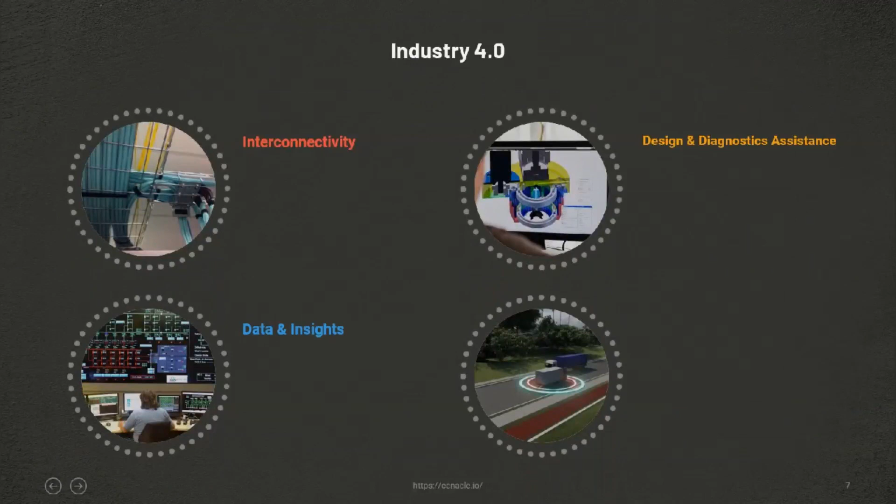Now after about 50 years, half a century, we are in the period of the fourth industrial revolution. What does it offer that is significantly different from the previous revolutions? The core key points and key drivers for this Industry 4.0 revolution are interconnectivity.

For example, we all know how human beings connect - we use mobiles, communication networks, postal services, etc. Human-to-human connectivity is very well known. But what about machine-to-human connectivity, and more importantly, machine-to-machine connectivity? There's also the concept of decentralized architectures, which we'll cover briefly in the coming slides. Machine-to-machine connectivity is going to redefine the whole paradigm of how machines work and cooperate together, so this interconnectivity is a new paradigm that did not exist earlier.

In earlier periods, a machine was a black box - you didn't know what was happening inside. A machine could be heading towards a breakdown at any point in time and you wouldn't know. This interconnectivity, combined with data and insights - real-time insights into what's happening inside, transparency about the machine's capability and status - defines a new paradigm. I'm going to demonstrate a bit about condition-based maintenance, but overall this redefines the asset utilization of the machinery.

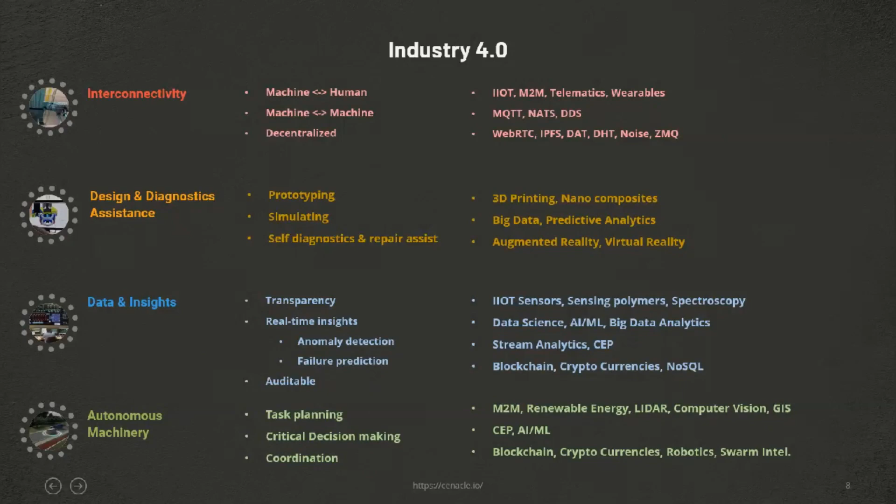So let us start with the first one, machine-to-human connectivity. How does a machine inform about itself to a human?

As I said earlier, every machine is a black box. Now we are trying to get more information about the machine to humans, either to get administrative suggestions, or to make business planning easy, or to plan for fault tolerance or failures. The core concepts here fall into two areas. One is sensors: every machine or asset is attached with some sensors that gain data about the status of the machine and relay that information to the people, the stakeholders.

So the first part is the sensors. The sensors could be analog sensors or digital sensors. Digital sensors are gaining more rapid adoption in the industry, but till now we have these analog sensors that gather data. So what kind of sensors do we mean? For example, there are many sensors which we already use in smartphones and many of our machines and IoT, etc. Things like proximity sensors.

For example, when two items get in contact, such as a door, whether it's closed properly or not, or a brake, whether it contacted properly or not. Then vibration sensors identify the frequency of vibration of an asset or machine. If anything goes beyond a certain limit, these vibration sensors give an alert, or they keep monitoring the frequency with which it is vibrating.

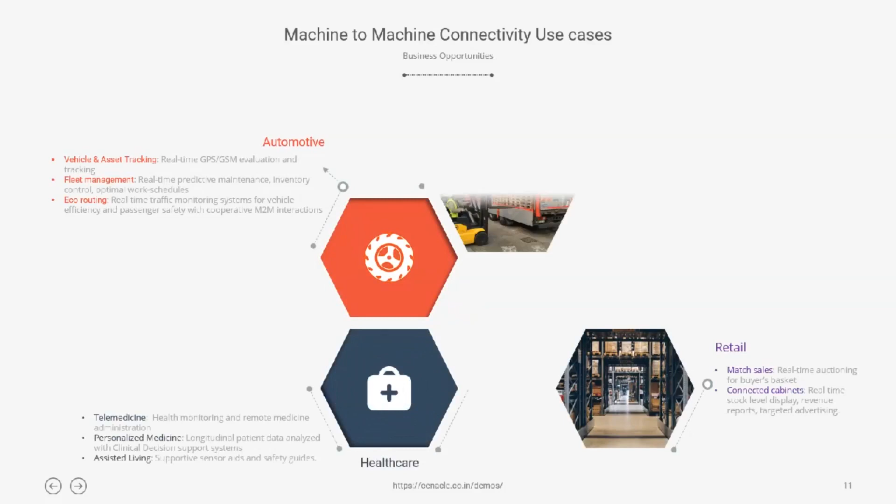This is the use cases. And these use cases are not restricted to one area. They span over multiple sectors, whether you name it automotive, retail, finance, supply chain, energy, healthcare, education. So many, for example, starting from predictive maintenance or condition-based maintenance, tracking your vehicles in real time, auctioning for buyer's basket, a connected cabinet in retail industry, telemedicine as we were just discussing in remote areas, personalized medicine, monitoring a smart grid, or remote monitoring of oil pipelines in remote areas where there is nobody.

Especially these oil pipelines, they need to be monitored continuously because it's very risky as well as very costly an affair if any oil pipeline breaks down. And then the whole supply chain industry is going to be revamped thanks to this machine-to-machine connectivity.

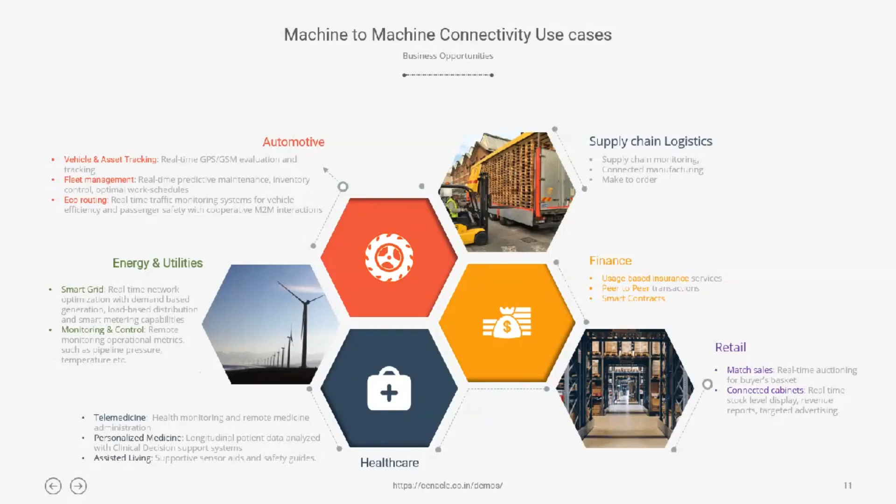There are some very important Industry 4.0 contributions that create new opportunities, things like make-to-order and connected manufacturing a possibility. We are going to see one specific case here, which is predictive maintenance, let us say condition-based maintenance.

When we're talking about condition-based maintenance, let us say there is a vehicle and you need to identify whether that vehicle is fit for journey for the next 1 year or next 3 years, next 1 month, 3 months. How do you know when your vehicle is going to break down?

For example, on a train, there are OTMR which gathers all this data from 300 plus sensors, things like the speed, the traction control, whether a door is closed or not, whether brakes are slipping or not, etc.

So in a typical vehicle, it's now mandatory by regulations that every vehicle manufactured after, I think, 2006 is equipped with OBD sensors, onboard diagnostic sensors. Right now you could go into your vehicle and connect your OBD sensor to your laptop or even your phone and start monitoring the data.

But how can you use that system and enhance it to predict when the machine is going to break down? So overall, we call it condition-based maintenance, where we predict the failure of a machine based on the condition of the machine. The machine could be a vehicle or anything - it could be an asset or even a human being. We'll come to that in a moment.

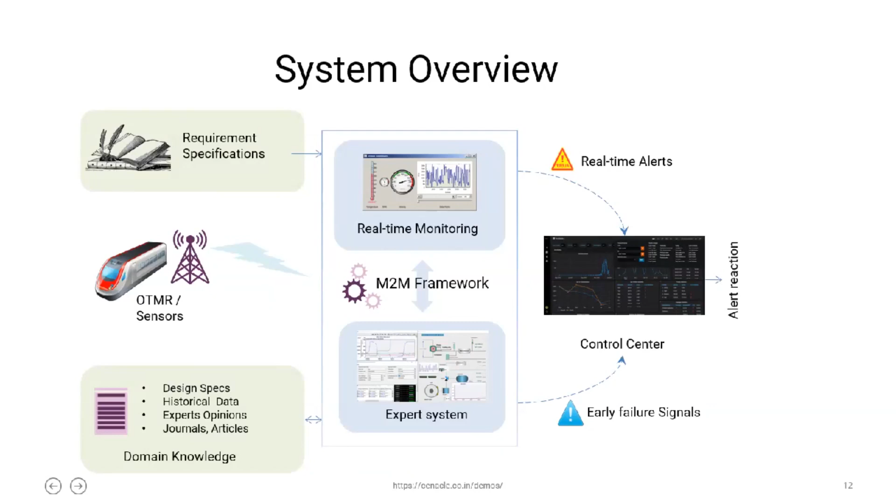So this is overall system of a condition-based maintenance. I'm going to demonstrate in a few minutes how this operates. But in general, the system or machine being observed could be anything that generates some data. For example, it could be a human being.

You must be aware of devices like Fitbit that gather data, body vitals, and then identify the trends. In general, you could identify the trends and then gather the data to make certain decisions about the condition of your health, and then raise immediate alerts to the caretakers.

So when we are talking about condition-based maintenance, it does not necessarily mean a vehicle. It could be a human being also. It's just that the domain is slightly different and the data that need to be captured is different, but the overall sensors, operations, and expert systems could be tweaked and trained for these kind of operations.

So let us have a brief demo of condition-based maintenance where I'll try to demonstrate how the process of gathering the data and identifying anomalies works, and then see how to predict failures, etc.

Overall, this kind of condition-based maintenance is useful for predicting remaining useful life of an asset. For example, what is the remaining useful life of my vehicle? How long could I use this vehicle before it breaks down? Let us say I know based on the data that the vehicle is about to break down in, say, 3 months. Then I could plan a predictive maintenance schedule so that I could take it to the proper maintenance people and get it revitalized or repaired.

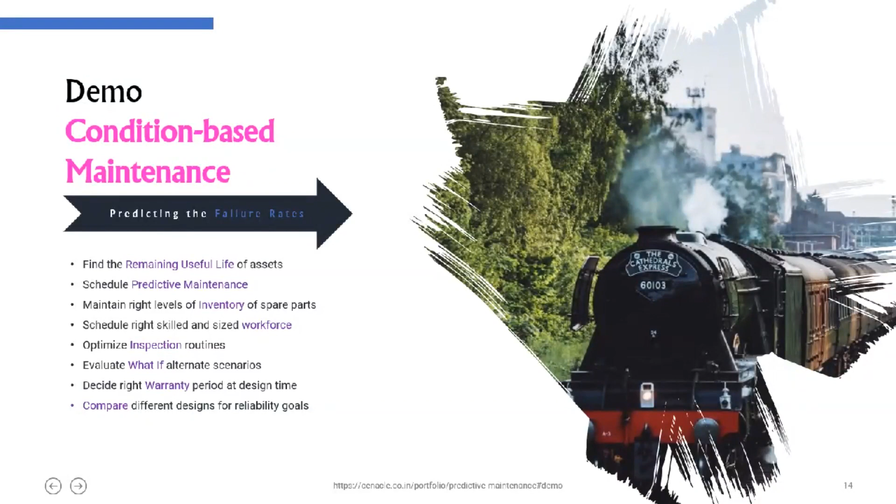So let me demonstrate the condition-based maintenance aspect, how we do it in the software. I'm going to demonstrate with some simulated sensors here. For example, I'm starting some sensor simulators, which actually, in a real world scenario, all this data comes from different IoT sensors, but here I'm simulating them on my machine.

And then I'm going to start a dashboard that is represented. For example, here we have 4 sensors that are sending data at different frequencies. Each is a different data point, like temperature, RPM, velocity, etc.

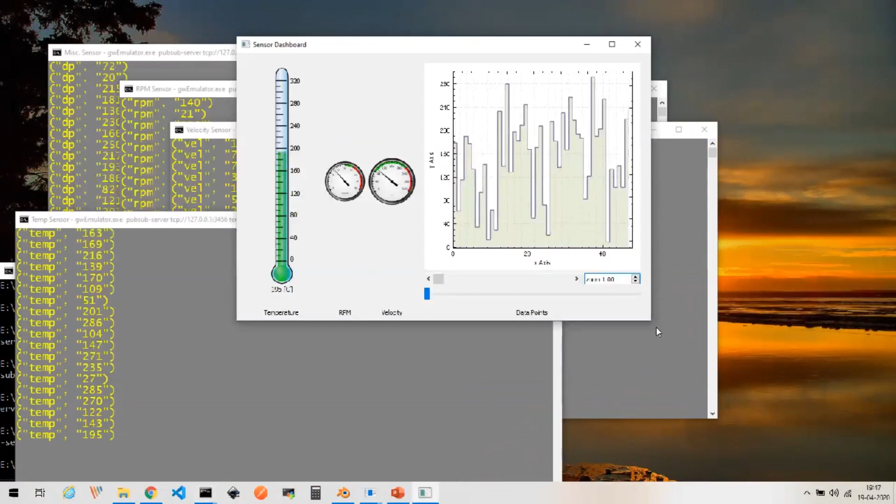And then we have this dashboard that gathers this data in a centralized control center and analyzes the trends over it. For example, here you could check this data coming from this temperature sensor. Whenever it is changing, the data is captured over the network and it is represented in the sensors.

Whenever it is going beyond certain limits, it records it as an anomaly, and here it is visually indicating it. It also indicates it through emails, SMS alerts, as well as some notifications to the administrative personnel. And overall trends are recorded here, and in real time the data is

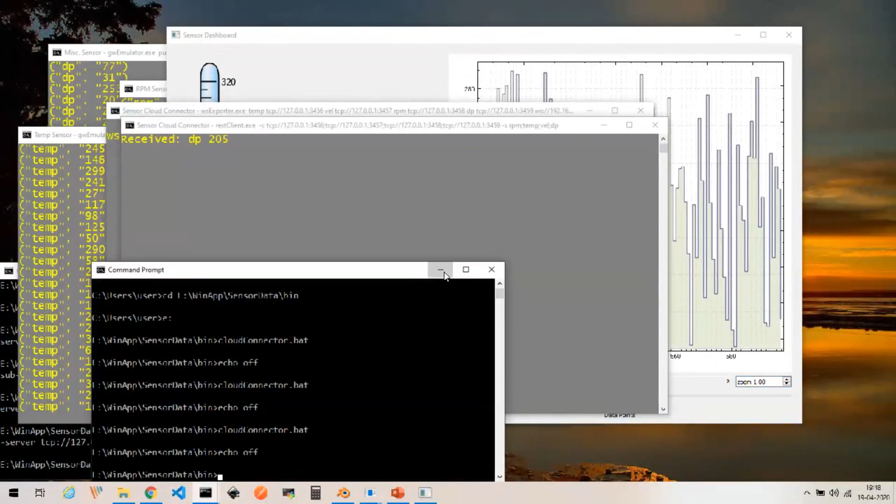streamed. Right now, the data could be streamed not only to your machine, but it could also be streamed over a network. For example, I am sending this data to, let us say, a cloud. For this, I have started the cloud connector, and I am also starting now a web server that will give me the, let us say, a cloud capability.

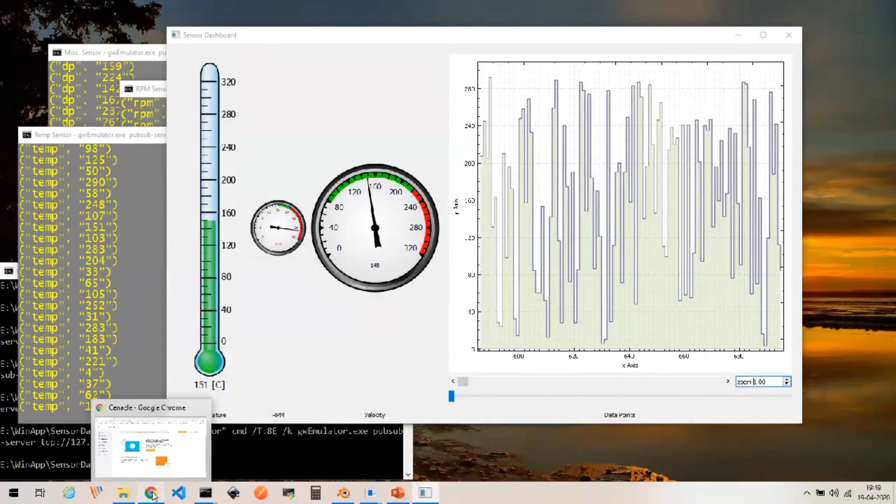Right now, I'm demonstrating it. I'm going to access the same data, network data, over a web page. And this web page could be hosted on any of your cloud machinery.

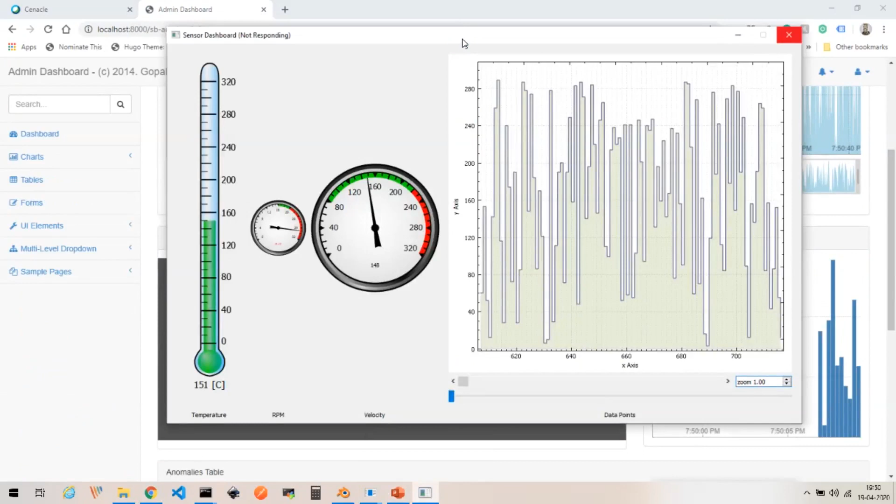And the data is same as being received on the centralized dashboard administrator. And here you could see the warnings that are being recorded. Whenever there is a critical warning or error happening, the data, hope the page is refreshing properly on this WebEx. But in general, you should be able to see all these warnings, etc., in real time as they propagate. And then the notifications could be sent to the administrators.

So this is the data capturing part. Typically, we do this with different technologies here. In this small connectivity part itself, there are so many technologies that are involved. And then what I'm going to do right now is demonstrate a condition-based maintenance, how it

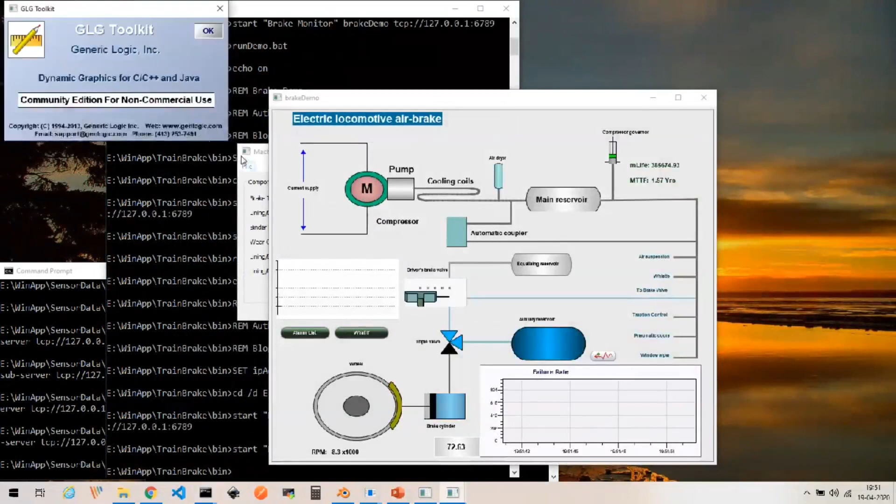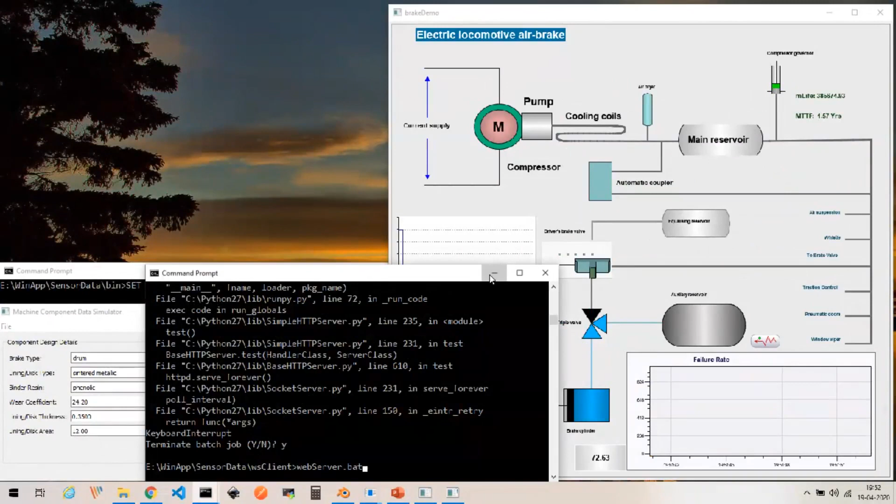here. What I'm demonstrating is, let us say, a brake failure. Consider an electric locomotive and electric train, and it has so many components.

One of the components is a brake, let us say, and our goal is to predict when the brake is about to fail. Now, when we say a machine failing or a vehicle or asset failing, it does not necessarily mean the whole machine is failing. Some components of the machine fail. The goal is to identify which component is failing and then do proper maintenance for that particular piece before it fails.

So here we're talking about doing prediction for failure for a brake.

What I have here on the lower left hand side is a control to help me vary the operating conditions. For example, this locomotive could be operating under different conditions of temperature, different load weight, and then sliding velocity. Sliding velocity means when you apply the brake, how fast the brake is slipping. And then brake application rate, how many times the brake is being applied per minute, and how long you are applying the brake, etc. And then there are some conditions that do not change.

For example, things like the brake type. There are multiple brake types like drum brake, pad disc, slotted annular disc, and annulus disc, etc. Each type has its own properties, its own characteristics of failure.

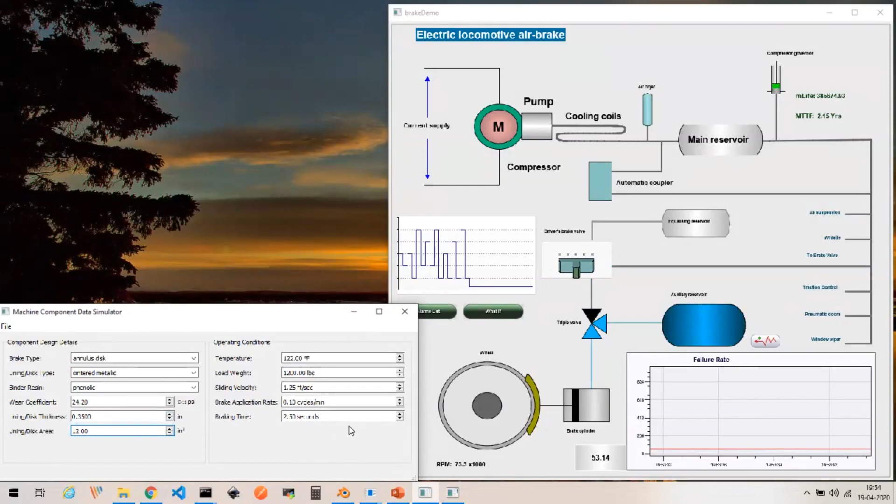They do not change. But then some properties change. For example, operating conditions. When your vehicle is going on a different terrain, like let's say a mountain terrain, or a very cold ice-frozen terrain, versus a heavy damp terrain like a nearby river area or flooded areas, etc. These operating conditions change over time. Nobody can predict them.

So what we have here is a controller that simulates these kinds of operating conditions. And then on the right hand side, you see a schematic diagram of a locomotive air brake. Essentially, it's a very simple schematic diagram that indicates a triple valve that opens and closes based on the brake position. When the valve is open or closed based upon the valve's condition, the brake is being applied here in the bottom section.

And then when the brake is applied, the temperature increases, and then the brake pad may deteriorate, the material may deteriorate and then break down, the brake may fail.

On the right hand top section, you will see MTTF, the mean time to failure, and MLife. The MTTF indicates the mean time to failure in terms of number of years. For example, right now under these conditions, the MTTF is 2.16 years. That is, the mean time for next failure is about, let us say, 2.16 years.

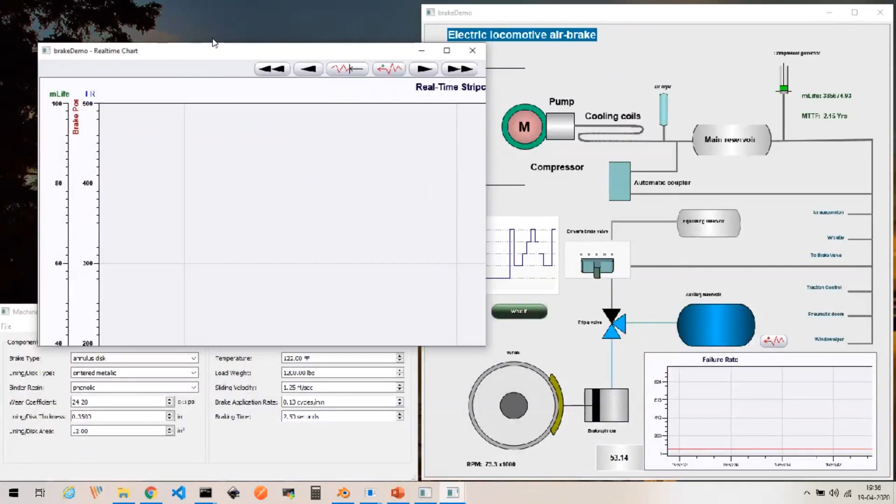And then there are these critical warnings, etc. If the mean time to failure goes beyond certain levels, the application will have these alarm lists. And then what-if scenario, we'll come to that. So let us say I change the operating conditions. For example, let us say I increase the temperature and then I increase the load weight.

As I increase the load weight and then I increase the application rate, that is the number of times I am applying the brake, you could see the failure rate here indicated with yellow, as well as MTTF on the right hand side top. It goes down because the brake application rate is influencing the prediction rate.

All these calculations are actual engineering calculations. Whatever you are seeing here are engineered calculations. They have very well mathematical theories behind them. So what you are seeing is a real-time simulation of a brake failure under certain conditions.

You could use these kind of simulations and calculations to identify which component is about to fail if your vehicle operates under these conditions. In this case, the brake, but it could be other components failing.

So when you have to assess the whole failure rate of a vehicle, then you have to combine all these failure rates of your tires, your brakes, your engine valves, and all the other components, and then finally come up with your safety ranking for your vehicle.

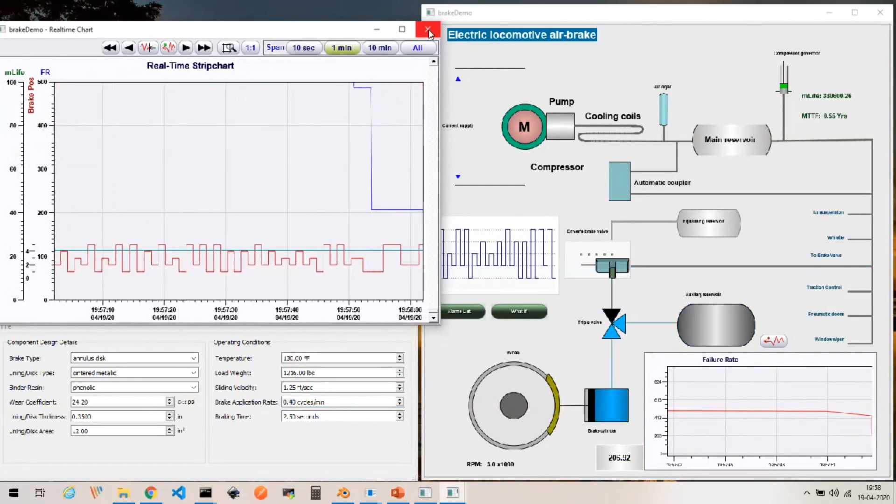And then most important is the capability to do what-if analysis. For example, when you are replacing your vehicle tire, let us say tire, you have multiple options.

For example, you could go with MRF tires or Apollo tires or CEAT tires, etc. But which tire is useful for you, you don't know unless you know what your usage is going to be, and then you have complete idea and understanding of the design. You may not know.

But with this kind of what-if analysis, what I'm doing here is that on the screen you see multiple calculations done for different combinations of brake types. For example, I have this drum brake here in the first row, slotted annular disc in the second row, and pad disc on the third row, where FR here is failure rate.

Failure rate per million hours is calculated for all these combinations. For example, on the top row, each column is a lining type, whether it is metallic lining or carbon lining, etc. And each row is a brake type.

So on the left hand side, component design, we have multiple factors like binder resin, wear coefficient, etc. But here, for this demonstration, we are taking two factors and identifying what-if alternate scenarios.

For example, if I increase the sliding velocity, you could see these calculations change. And overall, out of all these combinations, the one with the good combination is something that you want to pick up for your operating conditions.

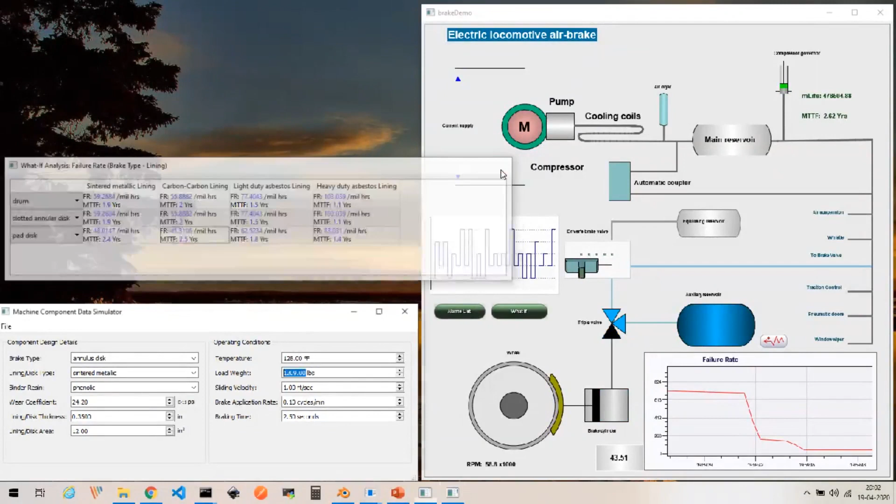That is the overall theory as well as practicals about this one. Till now we covered data connectivity and using the data to monitor for anomalies in real time, plus making certain decisions in real time, as well as predicting failures, plus what-if analysis possibilities.

What if analysis, let me assert again, is a very powerful combination: M2M with predictive analytics, especially the what-if analysis. What if instead of choosing that, what if I had chosen this? The other way to get that kind of insight is you buy both vehicles, or equip a vehicle with both tires and run it, which is a very costly affair.

So the technology is about to revolutionize many things. All these combinations of technologies work nicely together. What you have just seen is many combinations of technology. I could easily say about a dozen technologies combined together to form the demonstration I have given you just now.

And one more thing, like for example we were discussing about healthcare, right? So let me give that also. The concept is once again the same: data being captured in real time from different sensors and then monitored.

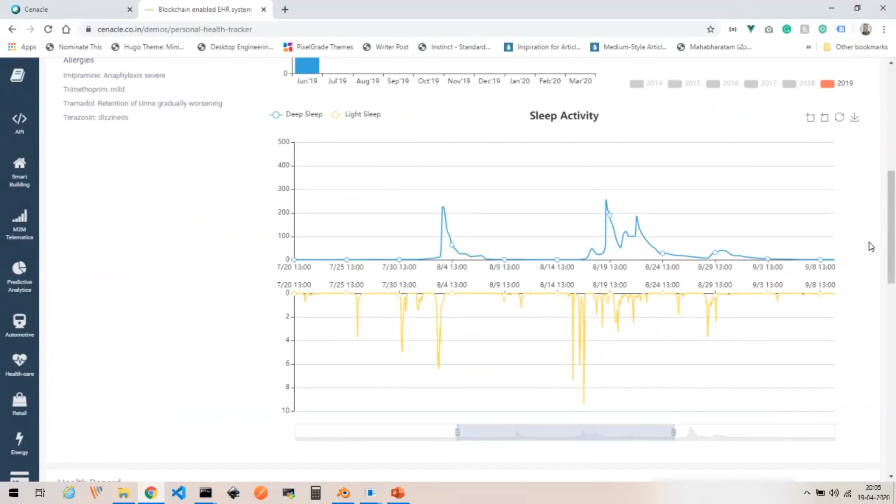By gathering this kind of information, for example, this is the sleep activity over a period of time, and the past medication history, what kind of medication he was using, etc. This is a combination of real-time data plus past history to identify, for example, reminders. What are the remaining ones?

He's supposed to go for colon cancer screening on a certain date. Influenza vaccine is due now, but he didn't go. He should be going right now. Pneumonia vaccine and control of cholesterol, etc. And these are the list of problems he had earlier, for example post-traumatic stress. He last visited a hospital in Portland but didn't follow up. And then there is this whole case notes, diagnostic and lab results.

All this is captured and maintained in such a way that decision support systems can make personalized recommendations for each person independently. So once again, I'm not going much deeper here because we have other things to cover, but these are the areas of technologies. Whatever I have shown just now uses multiple different technologies together to create that kind of scenario.

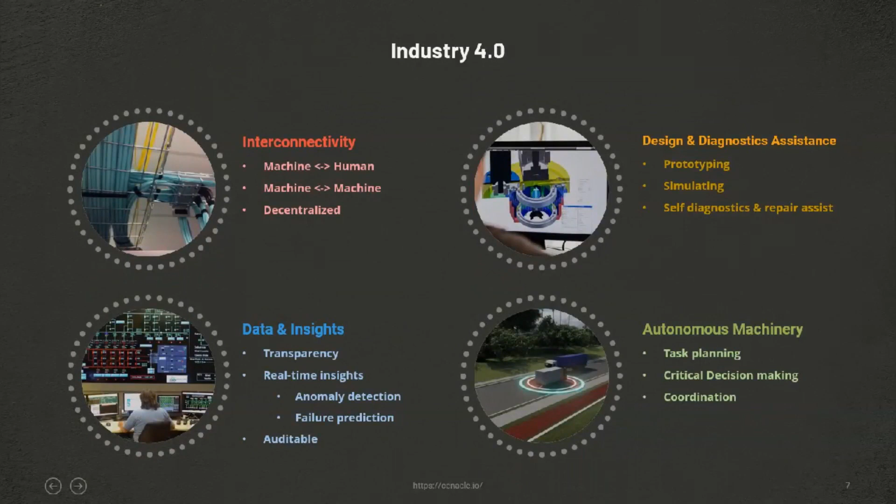Till now we have seen the connectivity part as well as the data insights part. If you remember, we were discussing the four contributing factors of Industry 4.0. We covered connectivity and the data insights part, real-time insights, anomaly detection, failure prediction, etc. Now we will cover the design considerations of Industry 4.0, and then autonomous machinery.

There is a question where somebody is asking about the software demonstrated just now. It is all proprietary, created by me. The software was built by us as part of demonstrations for various clients as well as case studies for different customers. So to answer your question, that software is our own software.

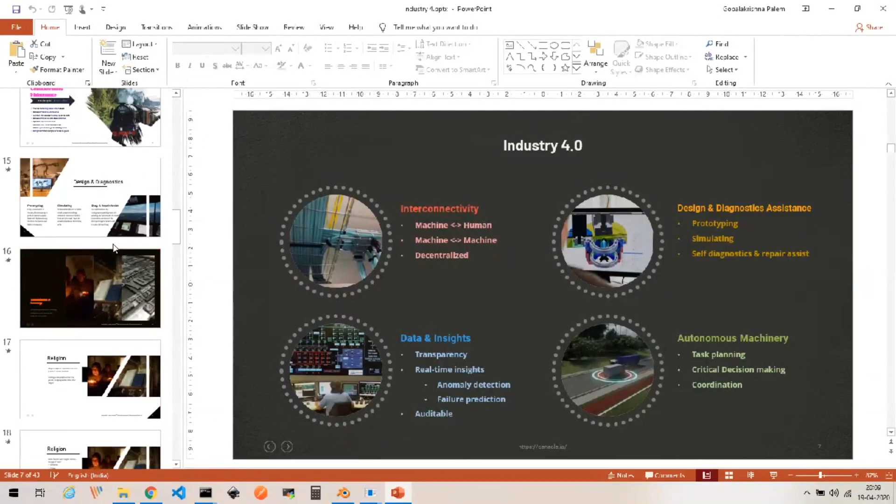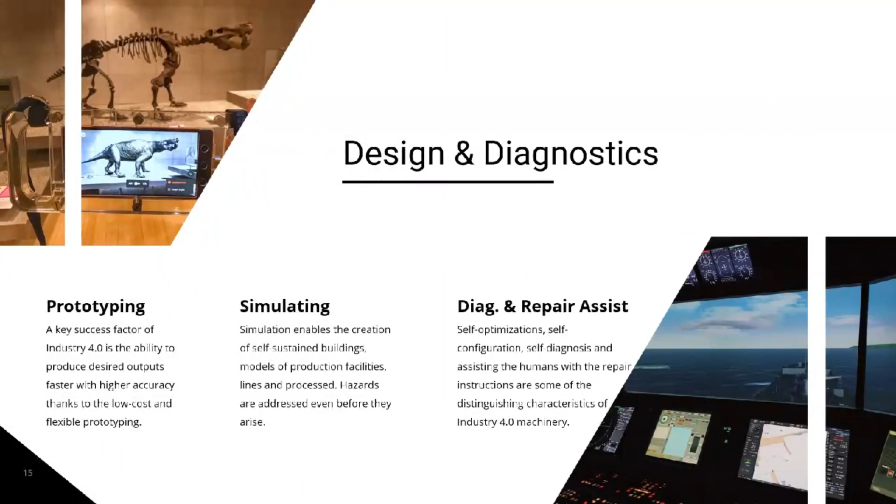Let us move on to design and diagnostics, where we will cover the prototyping, simulating, and diagnostics section of Industry 4.0. But before we understand this, we need to understand one very important concept known as the democratization of technology.

What does democratization mean? Democratization essentially means an average person being able to access a technology, any given technology being accessible equally to multiple people, to the overall population in general, without any restrictions.

To understand this, you have to understand the concept of religion, because this is a very important concept. It ties together the technology evolution and the demands of technology and the progression, and how societies operate and where the future is going to.

Religion always played an important role in the growth of human evolution. And as you know, nothing unites people from various backgrounds better than religion does. Across continents, people are united under different religions.

At the heart of every religion is a concept of a book. Almost all religions have a concept known as a book. It is what is central to them. You take any religion, there is certainly one book central to that religion. It could be one book or a series of multiple books, but essentially the concept of a book is central to the concept of a religion.

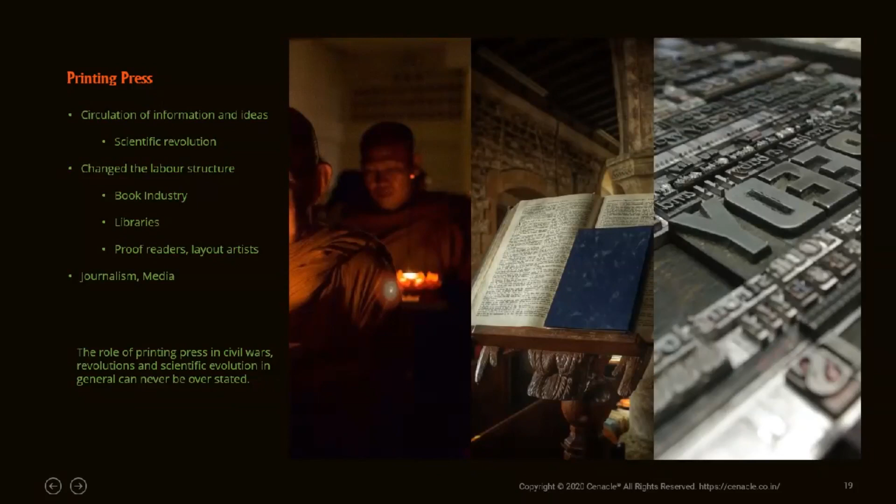This printing press is one of the core pieces that contributed to the democratization of technology. It's actually a stellar example of democratization of technology.

Another similar piece is open source software, open source hardware. For example, if you are working in the IoT industry, or if you are a hobbyist working in IoT, you must have used boards like Arduino or Raspberry Pi or so many other things that are all thanks to open source hardware.

And artificial intelligence and machine learning, we have been doing it for quite many years. For example, since the 1950s the concept of artificial intelligence has emerged and many contributed to it. But in recent years it gained major traction in the wider community thanks to the open sourcing of majority of these libraries that are released. Open source played an immense positive role in bringing the technology to the masses, and most importantly, to where it is in the industry today.

Another thing similar to open source is the internet. And when I say internet, I'm talking about the non-technical part of the internet, where, for example, anybody could - if anybody knows GeoCities from olden days - create their own blog, or use platforms like YouTube, TikTok, WhatsApp, where anybody could have freedom of expression. They could record their videos, ideas, or what they are doing, and share it publicly with anybody they want to, or with the public in general.

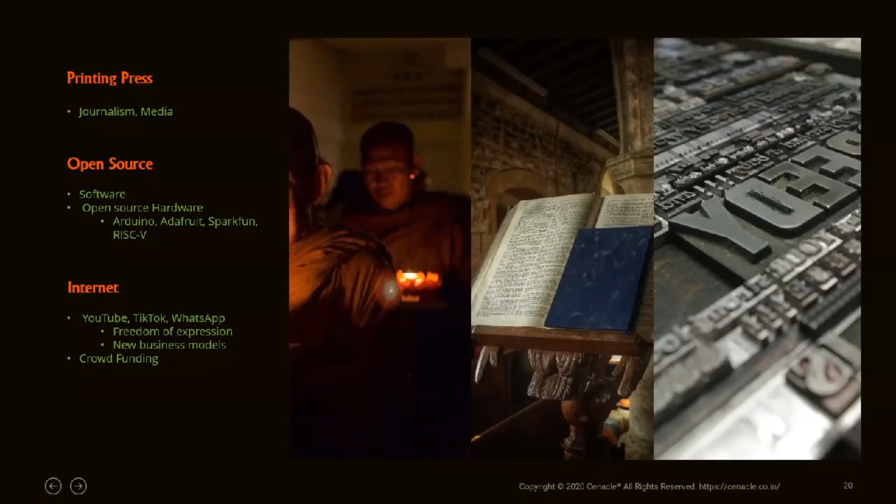Next in the series is the problem: if you, I, everybody could go and create our own books, our own software, if anybody can record their own video and start publishing it for a wider audience for consumption, how do you validate the truth in it? For example, fake news - we all know in certain circles like WhatsApp, YouTube, or in general on Twitter or Facebook, there is this problem of fake news. How do you identify what is right and what is wrong, what is valid and what is actually verifiable content?

That is the problem with democratization. Democratization brings the technology to everybody, but at the same time it does not really validate whether the person is authorized enough or qualified enough to use those technologies. In general, how do you fight this scenario?

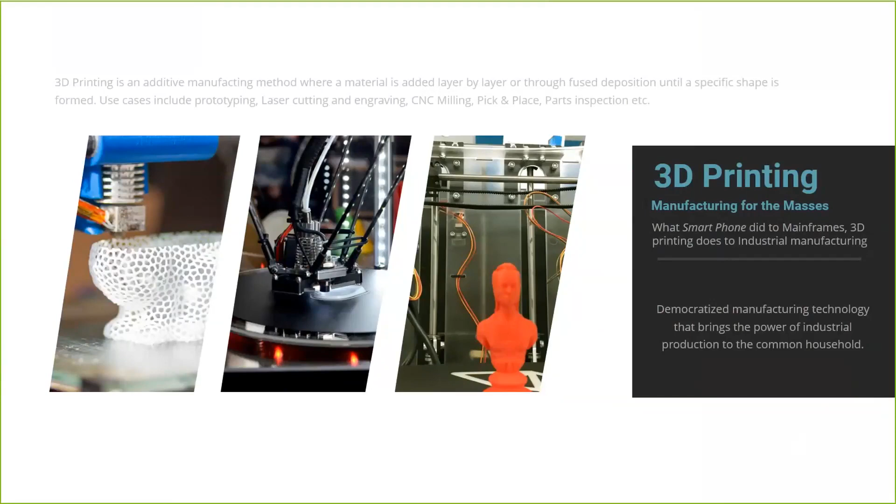I would like to call 3D printing the manufacturing for the masses. Consider this scenario. Earlier we had mainframes and supercomputers. What smartphone did to mainframes, 3D printing does the same to industrial manufacturing. It miniaturizes the production machine and makes it accessible to every common person. You and I can create, you and I can manufacture.

So what does 3D printing offer? It offers rapid prototyping. For example, you can do jewelry design or architecture models. You could quickly prototype mechanical parts, let's say a vehicle, a car. You could model your seats or steering wheel and quickly prototype and verify the model, for example aerodynamics of your vehicle body. You could study it with your 3D printing models.

It offers rapid prototyping. Earlier, if you had to do this kind of thing, you had to create molds, or create with a specific intent. A human being had to solder different varying parts, and then do it. But with 3D printing, in a single session, you could get all the parts for yourself.

Not only prototyping, we're talking about consumer products also. For example, drones - you could completely print a drone using 3D printing, the full parts, as well as automotive spare parts, for example valves, gears, nuts and bolts, etc.

What are the advantages of 3D printing? It offers quick production - instead of taking days or weeks, you could typically produce it within hours. And it offers precise resolution. Just like normal printing where you could print at lower or high resolution on paper, you could do the same for 3D printing. You can control the resolution and the accuracy. Accuracy is always high based on the model you choose.

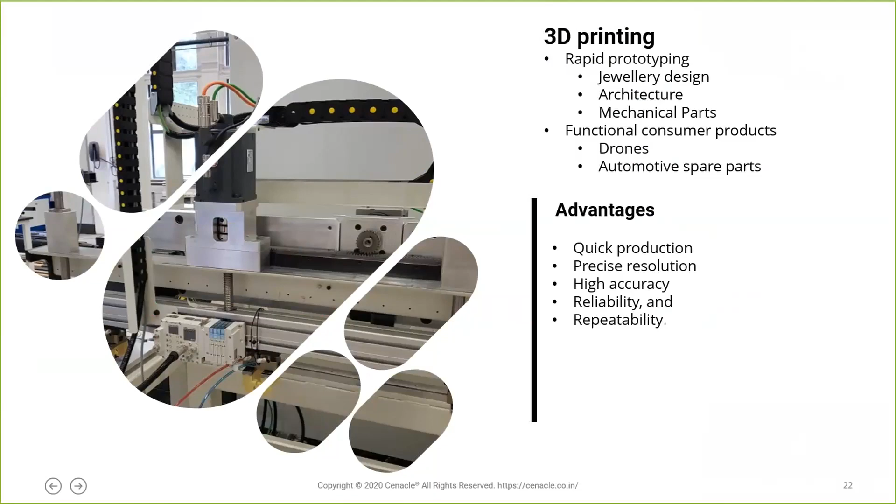Most importantly, it's reliable and repeatable. Once you build something out of this model, you could share the model with others and they could generate that same model too, which was not possible earlier. If you set up a manufacturing industry here, unless you have the same manufacturing industry somewhere else, it is very difficult and costly to repeat the whole process. The repeatability is a major selling point for 3D printing.

But it is not good for bulk production, it's not good for mass production. Unlike a typical factory where you could produce thousands of items in a single batch, 3D printing cannot do that, at least in the current stage. Rather, what it does well is personalized production. Essentially, 3D printing is suited for low volume, highly personalized production.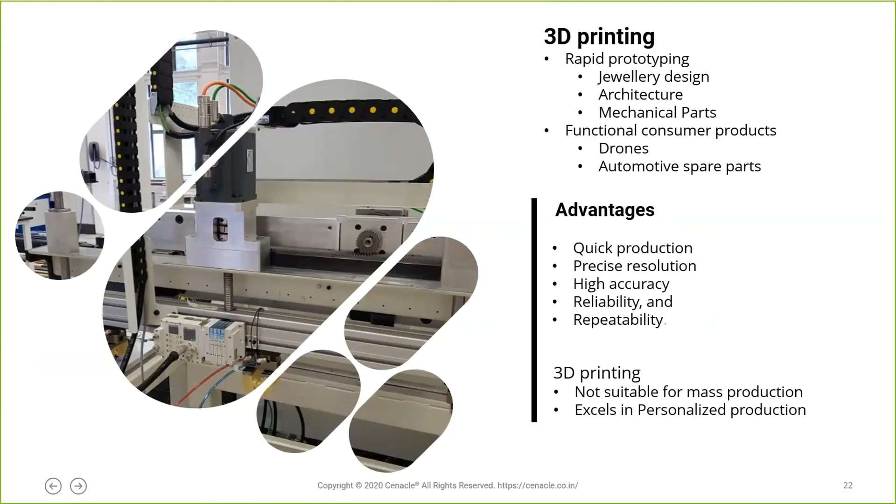But what kind of businesses need low volume and highly personalized production? Where do we need that? What else? Your home, to start with. People like to have their own home specifically designed for them. It is a low volume business, but highly personalized.

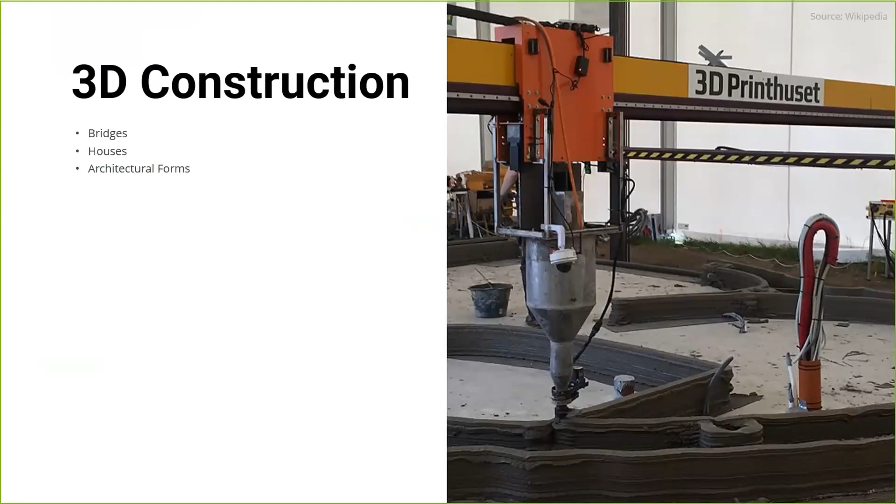3D printing, when you evolve it, we call it 3D construction. You could construct bridges, houses, and architectural forms. This is not just a concept - people have already done it. For example, in October 2017 in Russia, the first residential building with all permits approved was fully 3D printed and finished. People are actually living there right now. It's not a prototype, it's a real utility component.

The speed of construction is one of the reasons why people like 3D construction. Typically, you are looking at being able to completely 3D print a building in a day. That is the speed with which 3D construction can boost the construction industry. Countries like China, Dubai, and Netherlands right now are exploring this and creating new ways of improving all these construction mechanisms.

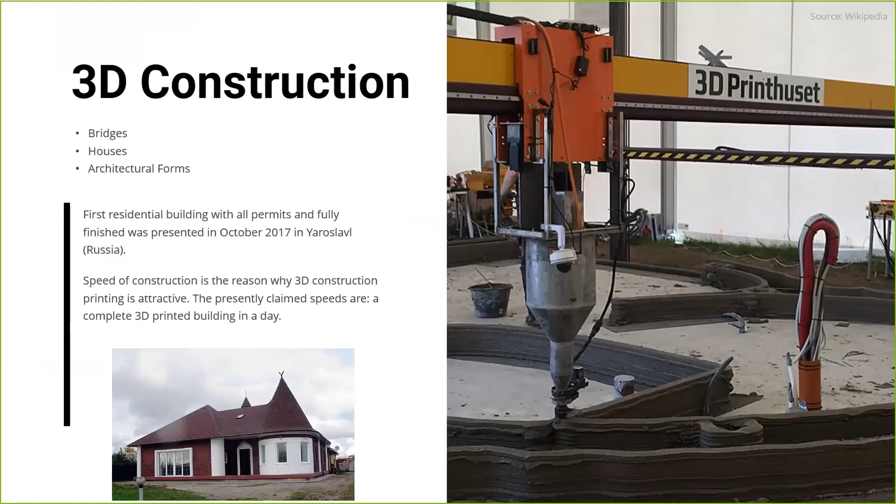And not only on this planet Earth, we are talking about creating 3D construction on a lunar base also. In 2013, the European Space Agency, in collaboration with partners, set up a lunar base printing project where the goal is to construct the complete environment required for habitation on the lunar surface, from materials available on the moon itself, which means the amount of material that needs to be transferred from Earth to moon is drastically reduced.

Theoretically, the expectation in the plans they made is that only 10% of the material is required to be shipped from Earth to moon, and the remaining 90% is directly gathered and utilized on the lunar base itself. Also, not only habitation, but other parts like landing pads, blast walls, roads, hangars, fuel storage, etc. are considered in the plan. It's an active and very interesting project that highlights the importance of 3D printing and 3D construction specifically.

There are a few points that need to be identified here. We were talking about low volume, high personalization.

What is the personalization here? The personalization here in this context, the lunar base, is not about the design, but rather it is about being able to use the specific material that is available in that particular context. So it is personalized for lunar, personalized for moon. Let us say you want to construct similar habitats on outer planets like Mars, Jupiter, or Saturn, then it will be personalized for those materials. So the personalization aspect here not only covers the design, but also covers the different aspects of material and construction mechanism that is different for each planet. That is the most important criteria.

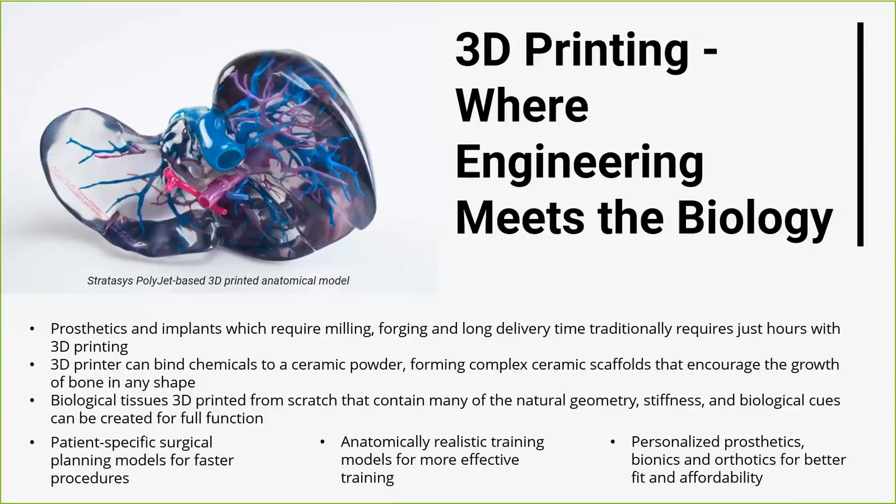So we have seen prototyping and how it affects, and how the democratization of the printing press and then the internet revolutionized the industry. And we also saw 3D printing, and we are talking about not just prototypes, we are talking about real construction, not only on Earth, but also across habitats. And these are real projects that people are actually working on — not just concepts, real projects people are working on, and you could contribute if you are interested.

For example, self-replicating robots is a very important concept in automation of space. If you are interested, there's a very good publication from the 1980s by NASA. If you are interested in those kinds of topics, you can read it — you will find it very interesting, and you will find many research topics there for you to explore the concept of self-replicating robots as well as self-printed habitats on lunar and extraterrestrial machinery.

Moving on to the other concept in industrial revolution, the simulation. How does simulation help? For example, we were talking about smart machinery, smart factories, so let us focus slightly on smart cities. So let me ask a simple, silly question, so to speak.

When we say smart city, are we talking about every person in the city being smart? So what exactly are we talking about when we say smart city? Rather than a smart city, for this discussion let's focus on safe cities. A city is safe if every person, and eventually every building and every property in it, is safe.

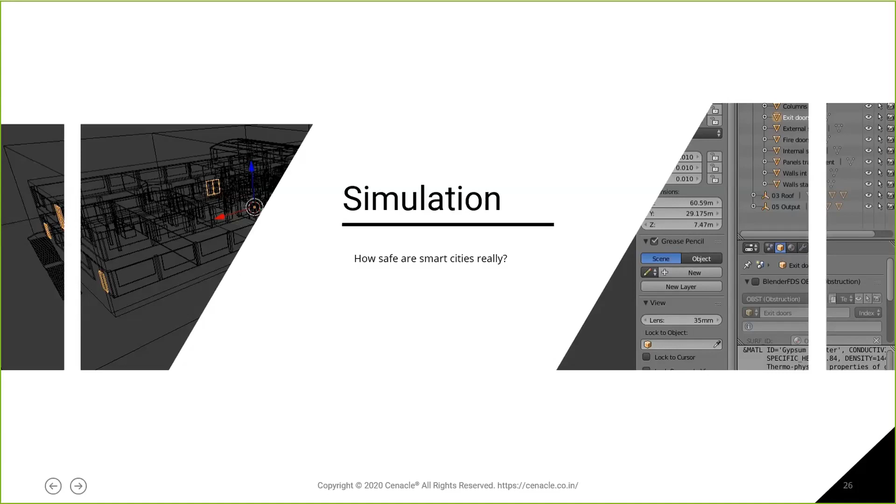It is called structural safety. For example, there are buildings in a city where people gather in large numbers, like public meeting spaces, auditoriums, or movie theaters. How do you assess the safety ranking of such a building?

For example, if people gather in large numbers and anything were to happen to the building - a building collapse, fire hazard, or flood - how easy would it be for the people to be evacuated in those scenarios?

Let's say a building has 10 floors, and a fire happens on the 10th floor. How long does it take for the fire to propagate and spread to all the rest of the floors, and how long before the last person can be evacuated? These are some of the questions that could be answered by structural safety simulations.

We could do what-if analysis - for example, if the fire happens on the 10th floor versus the ground floor, how fast does the fire spread, etc.

So for now, let me demonstrate to you one simple simulation.

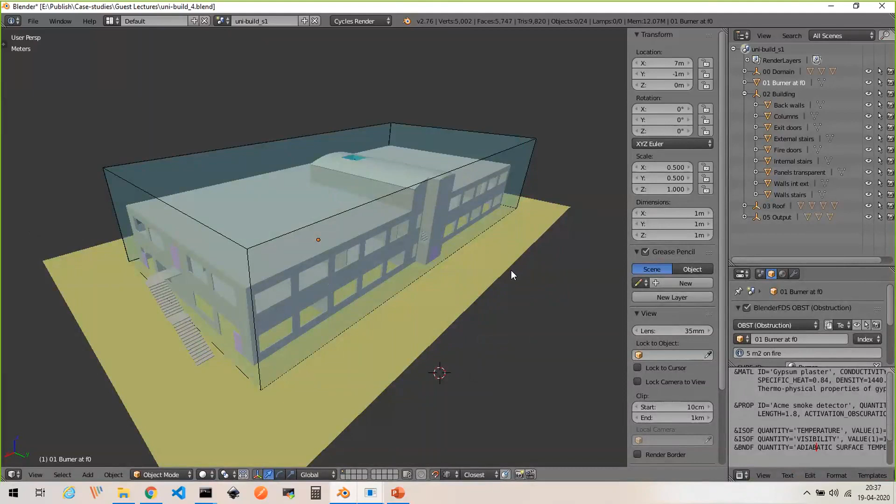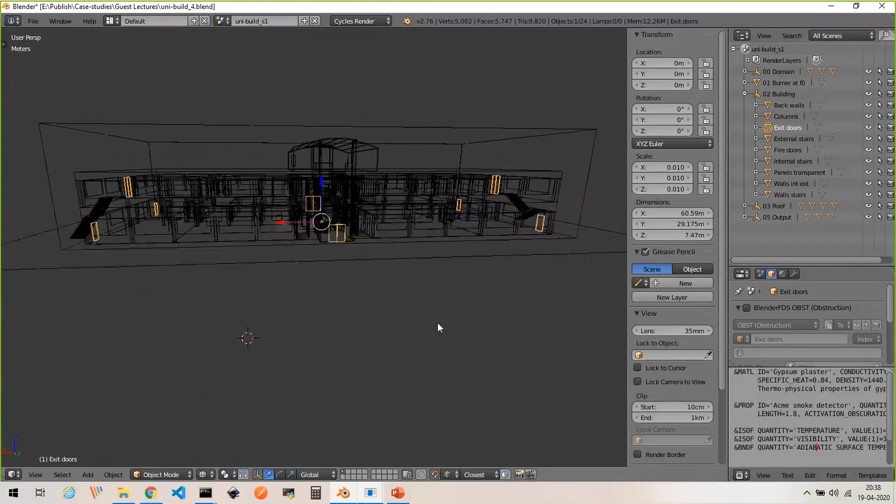What you're seeing on the screen here is a 3D model of a building. As you can see, it has 2 floors, and it has a certain number of exits in these highlighted locations - for example, 2 on the top floor and about 6 on the bottom floor. Then there are stairs here, and there is a central shaft in the building for the lift.

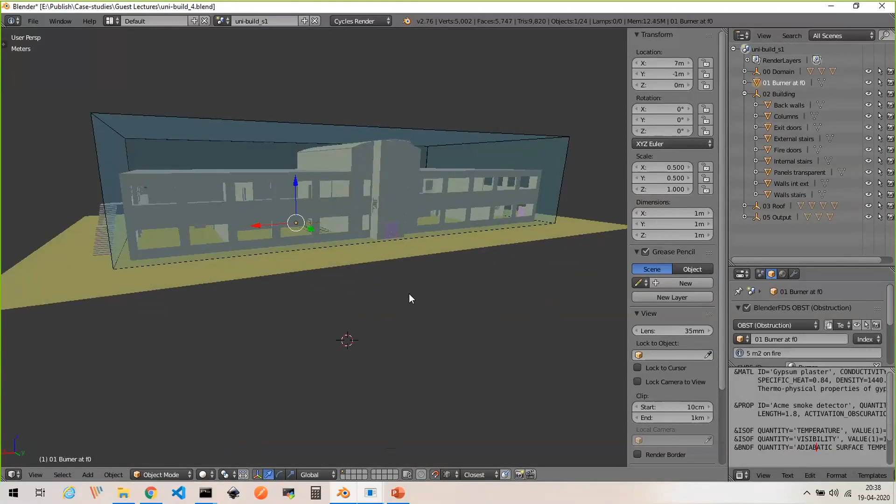The central shaft here is the lift location. Let's say there is a burner here - you could consider it a fuel source, like a gas tank or a fuel tank.

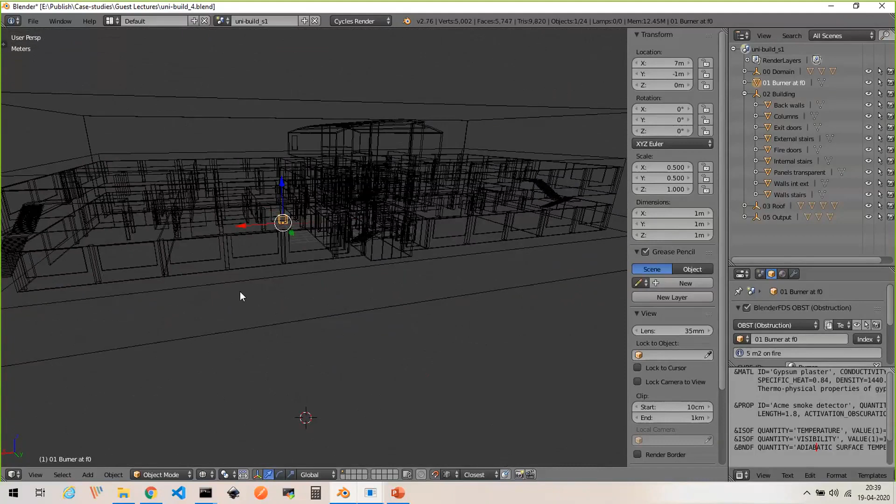Our goal is: if this gas tank or fuel tank on the ground floor explodes or starts to burn, how long will it be before the whole fire engulfs the building? How long will it take for the fire to propagate and completely occupy the whole building?

This is where fire dynamics simulation comes into picture. We take this 3D model and run fire dynamics simulation on top of it with respect to this fire's starting point. We also consider things like any hazardous material present.

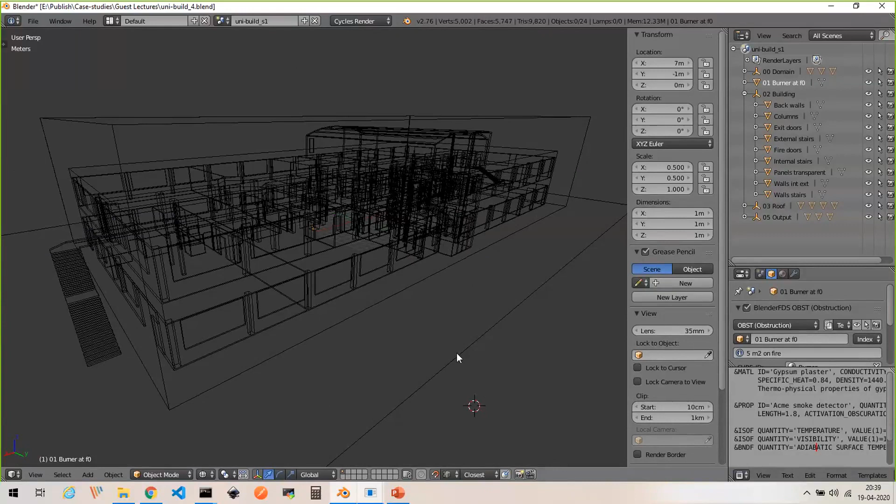For example, wood or burning material like clothes, the number of windows, number of doors, and the airflow that is happening - they all influence fire propagation. We take all these into consideration and simulate using physical equations - heat simulation, heat propagation, and fire propagation equations - to come up with a model.

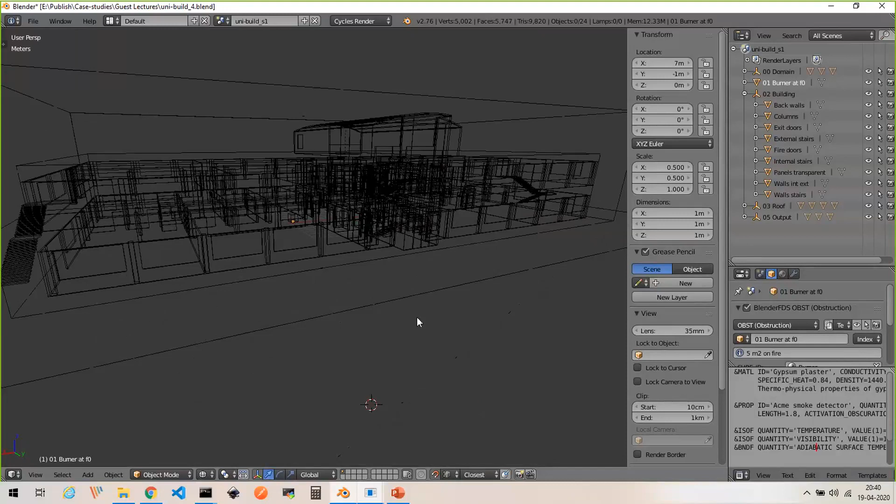This lets us observe, identify, and predict how long it will be and how the fire behaves. I've already done this simulation because it takes a lot of time - in this particular case, it took around 40 hours on this machine to completely render these calculations.

This is once again where big data and high computational resources, like quantum computing, could help simulate all these scenarios in parallel.

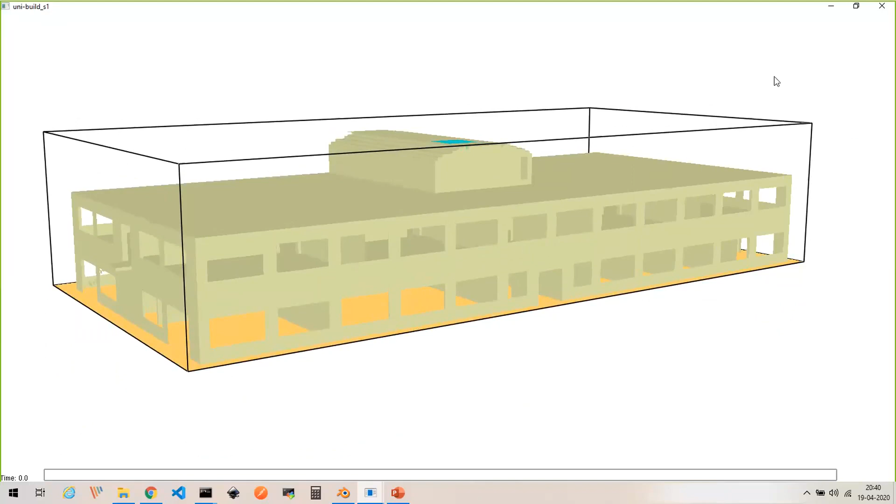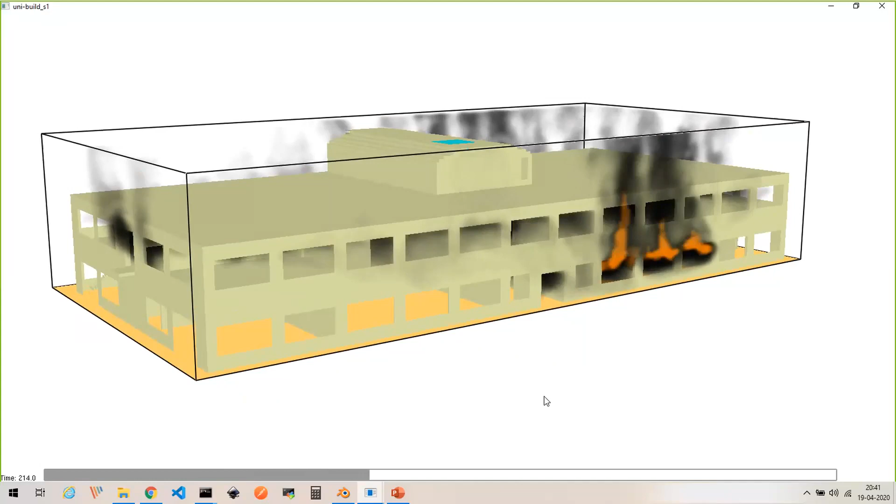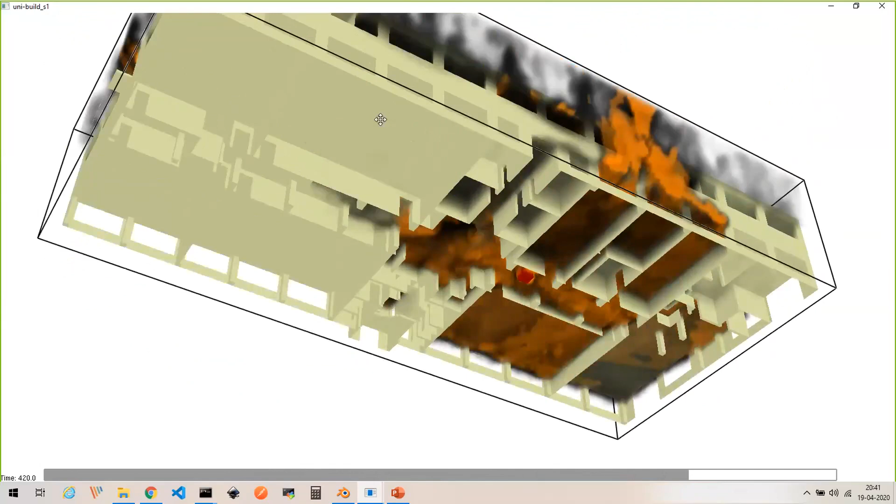What you're seeing on the screen here is the same model, but now simulated. I hope you're able to see the fire and smoke animation coming on the screen. When the fire starts at the bottom point here, it begins to propagate through different channels, windows, and open spaces, spreading to different locations in the building.

For example, let me...

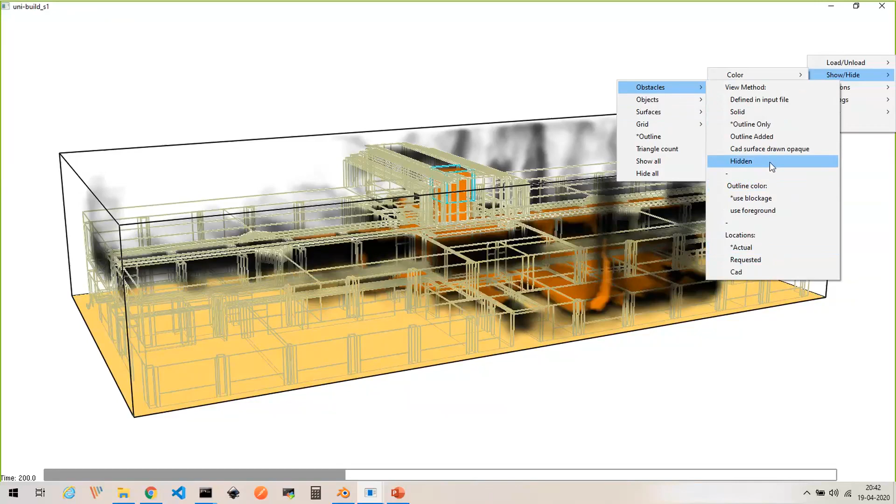Let us start in a slow, step-by-step scenario. Here the fire started, and the time shown is the actual real time in seconds. The bottom screen has a bar with a timing that corresponds to the number of seconds since the beginning of the simulation.

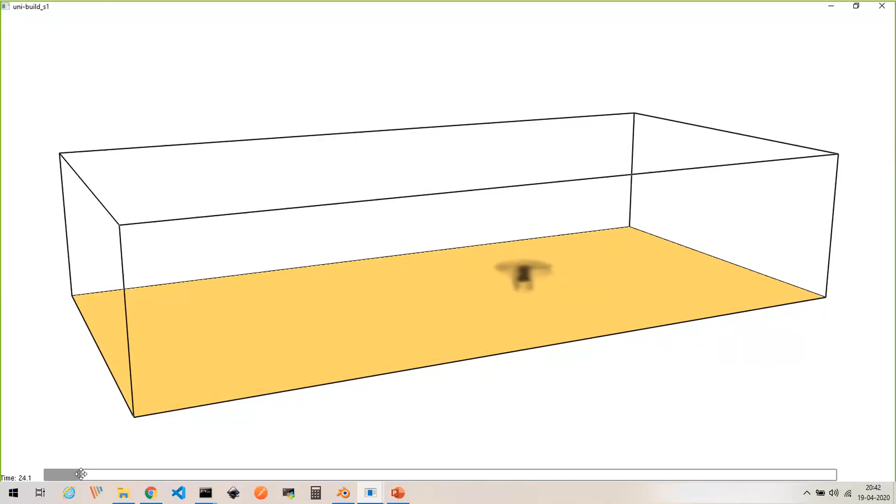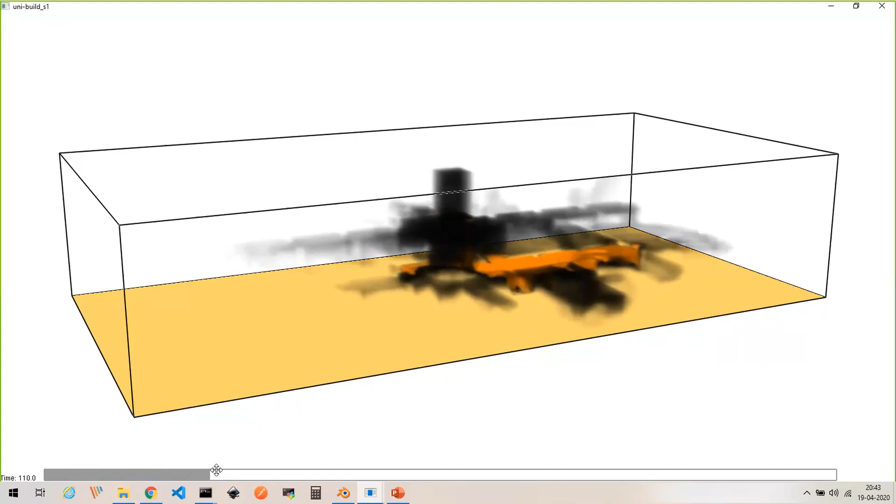The fire started to emerge in the bottom section and is propagating on the ground floor. You can see it going up the vertical shaft and starting to engulf the first floor. The smoke already started engulfing the first floor, creeping up, and fire started to emerge there as well.

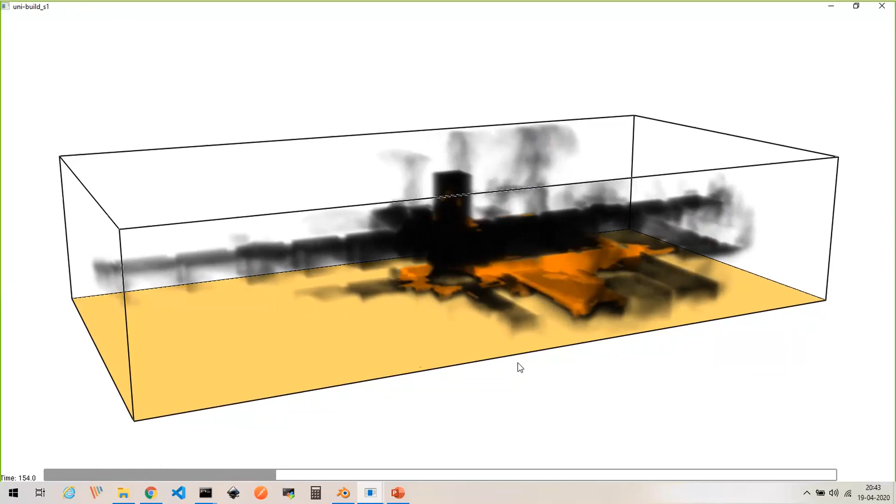That is around 110 seconds, about 2 minutes. As we keep progressing, by 150 seconds the whole corridor of the first floor is completely filled up with smoke, and the ground floor is already flooded with fire.

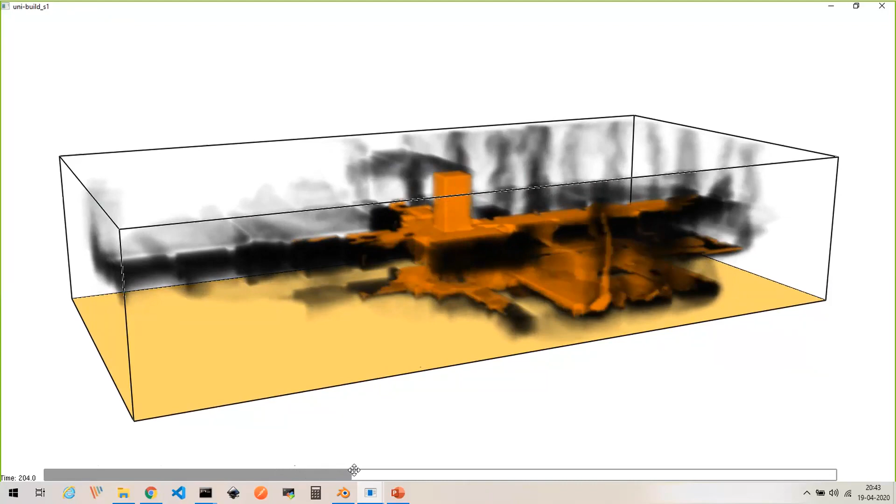By 160 seconds, fire started to emerge on the first floor. As we keep progressing to 200 seconds, on the right hand side the corridor is completely filled with fire.

By 240 seconds, smoke and fire completely took over both the left section and right section on the top floor. 240 seconds is about 4 minutes.

After a fire event happens on the ground floor, in this particular design for this particular building, you have 4 minutes for the people on the first floor to evacuate. That is by no means enough. 4 minutes is not enough for anything.

Where did things go wrong? In this particular design, things go wrong because the central shaft, which is supposed to be used for the lift, acted as a conduit for air to flow freely, sucking in the bottom fire and making it propagate into the top floor.

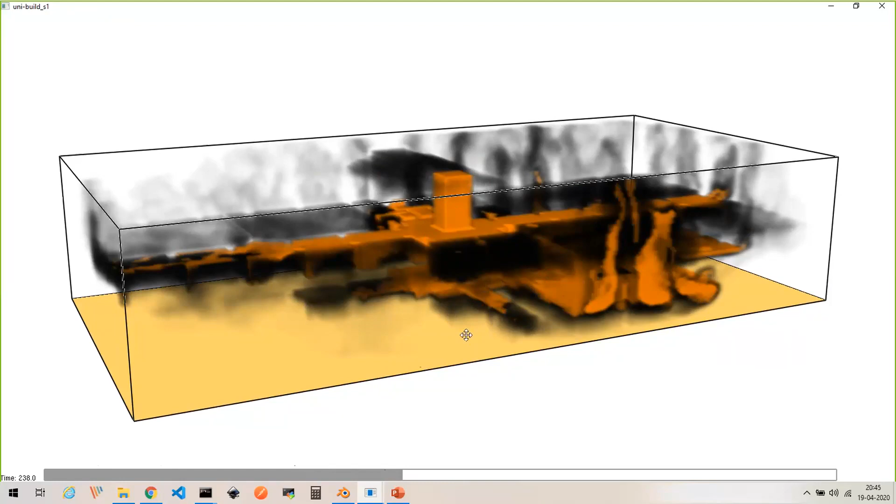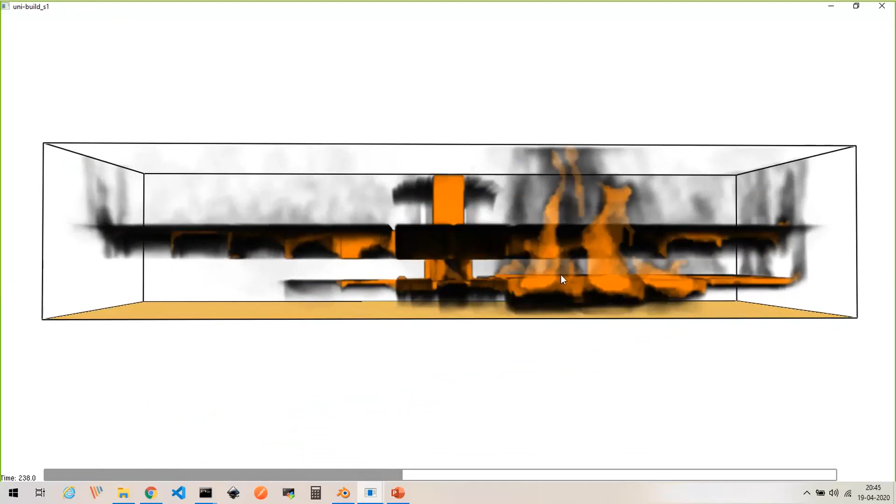If you look at it, the ground floor, left hand side, is relatively fire free and smoke free compared with the top floor. That is because the central shaft acted as a conduit. On the right hand side, the fire is very heavy.

You could also measure the temperatures at each point. By 240 seconds, you could see the temperature is unbearable. No one will survive those kinds of temperatures.

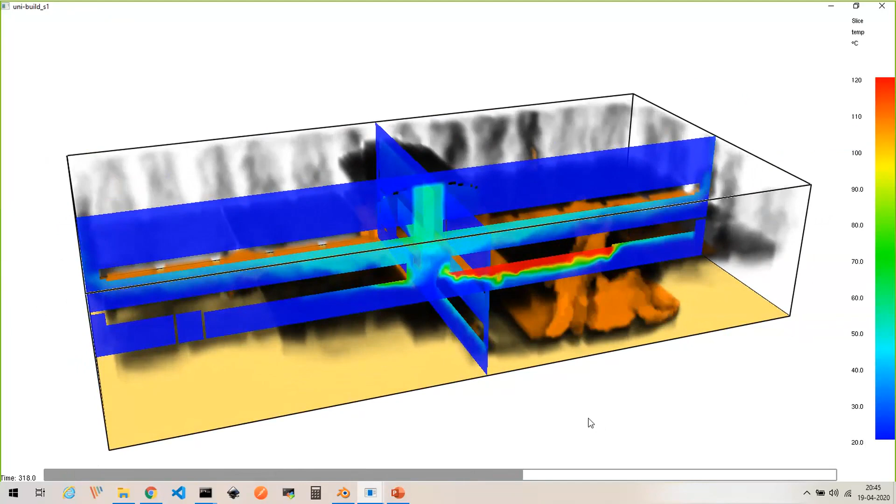So this is one particular scenario where the fire started on the ground floor. What happens if the fire rather started on the first floor, or the right hand side, left hand side, etc.? Those are other 'what if' scenarios. What if it started somewhere else? What if there are multiple fires at the same time?

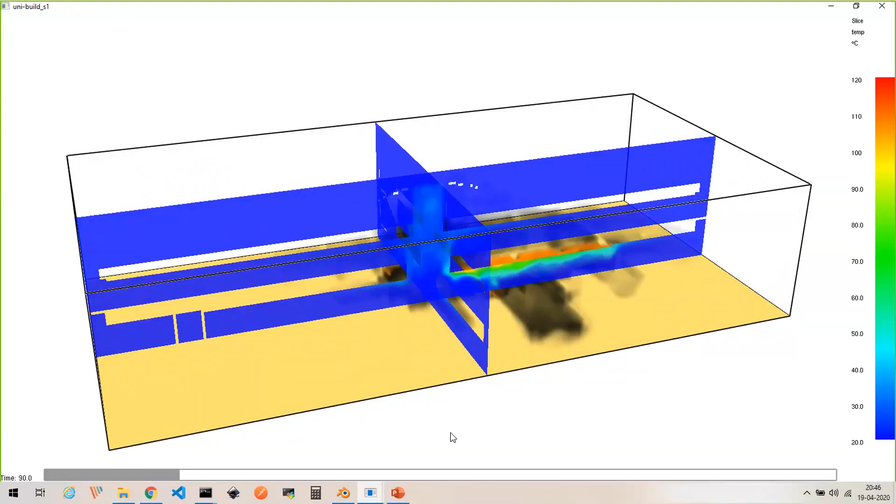What if there is no central shaft? What if the burning rate of the fire is less, etc.? All these could be analyzed and studied.

This is once again where big data and quantum computing, etc., could help fuel and accelerate the speed of these calculations.

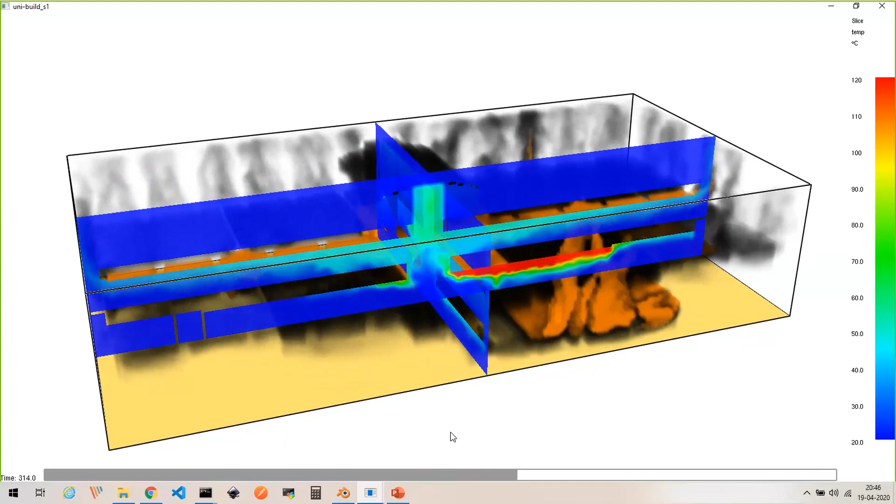By studying these and understanding the safety hazard risks for any given building, governments could mandate certain regulations. For example, whenever a building plan is proposed, it could be studied for all these kinds of variations.

And fire is just one simple example. Other scenarios could be flood, collapse of a building, and other scenarios they could think of. All these could be simulated. We have the technologies and the equations to simulate all these things and then identify the safety rankings for buildings.

This is where Industry 4.0 simulation and many technologies come into picture—for example, the simulation, 3D modeling, engineering calculations, big data, and in future maybe quantum computing, for parallelizing all these equations to identify one certain optimized model of a building. All these are playing together nicely to solve human problems for the future of our society.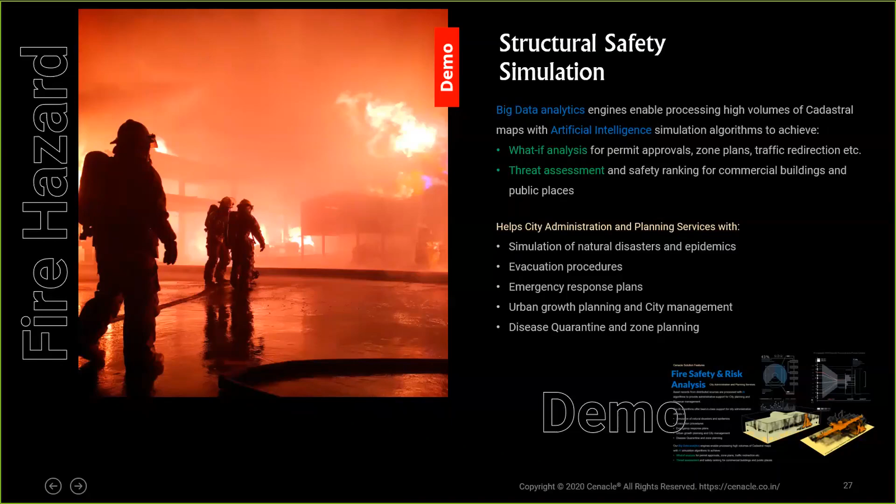Are there any questions before I move on to the last part of this presentation?

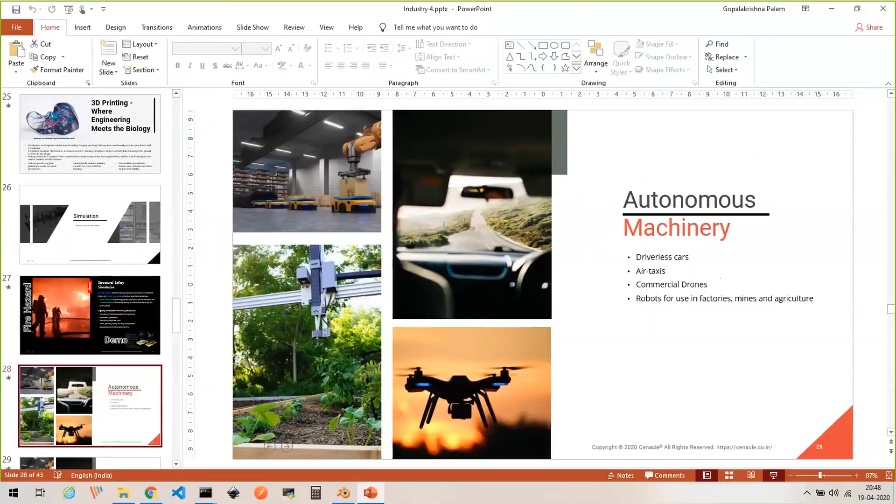Moving on to the last part of the presentation, which is autonomous machinery. This is the last contribution from Industry 4.0 for our current generation, in terms of the technology evolution that clearly separates this revolution from the previous revolutions.

When we say autonomous machinery, we are talking about things like driverless cars, air taxis, and commercial drones that many businesses are already working towards, and robots for use in factories, mines, and agriculture. One concept that all these use heavily is sensors and lidar, etc., and they rely heavily on computer vision.

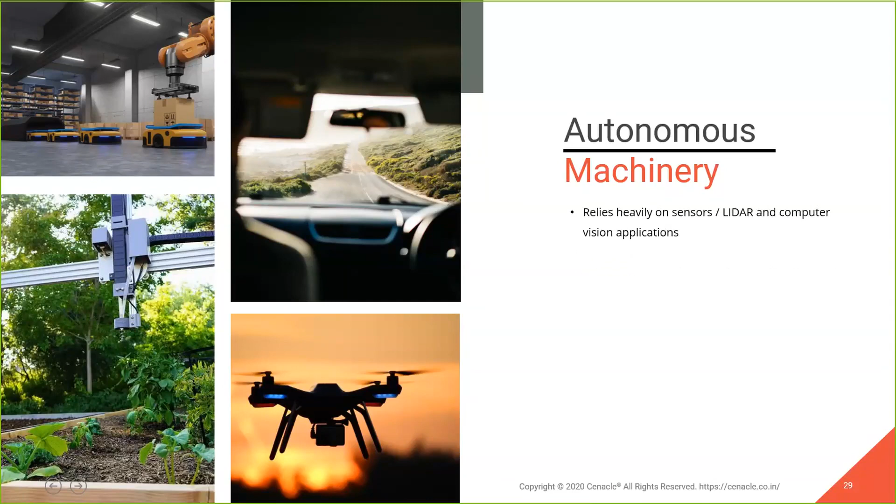The challenges here in this technology are poor visibility conditions, like darkness, fog, rain. Can these sensors operate well in those circumstances? These are the open challenges we still have, and this is ripe for research as well as business opportunities. How do you ensure pedestrian safety? So to address all these concerns, let us consider driverless vehicles at the simplest, lowest common denominator.

The Society of Automotive Engineers have defined in the industry 6 levels of automation. Essentially, level 0 is where you don't have any automation in your vehicle. You, as a driver, you drive it. No automation, no support at all.

Level 1 is where there is some sort of support for cruise control and lane assist to keep your vehicle in the same lane, which reduces driver fatigue. But you still have full control over the vehicle, and you still have to monitor the driving environment. You still have to apply the brakes, and it is your responsibility as a driver.

Level 2 is almost similar, except there is a little bit more control by the machine in terms of steering control, maintaining the same speed with respect to any vehicles before you, reducing the speed to avoid collisions, etc. But still, you need to have hands on the wheel, and you still need to, as a human being, monitor the driving environment.

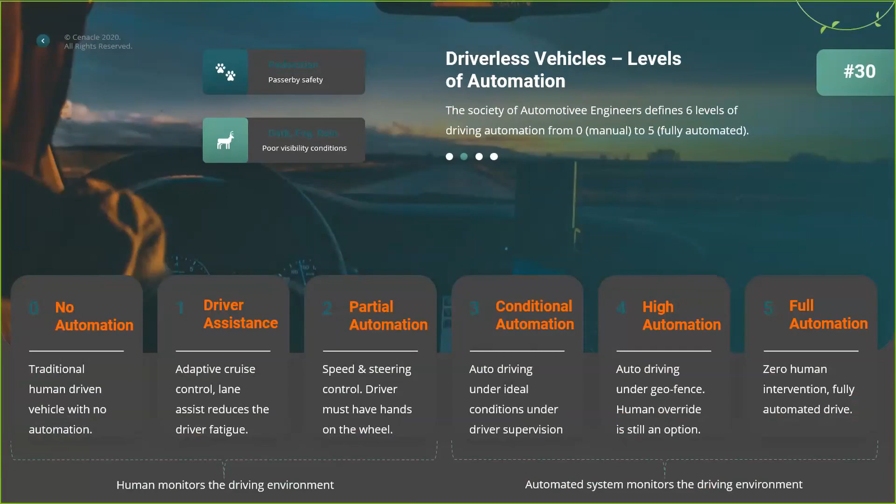That is the present scenario, where we are at level 3, and level 4 is what businesses are trying to target. As I said, this is an industry that is ripe for invention, and many challenges are there. If you are interested, this is one good business prospect as well as a research prospect.

These machines, these driverless vehicles, rely heavily on sensors and on sensing the environment, essentially computer vision processing algorithms, also known as machine vision.

One interesting application of machine vision in a different area is agriculture and food processing. It is heavily used there, for example, to identify crop diseases, to inspect and monitor pests and control them, for example pesticide delivery through drones, monitoring the yields, and identifying and removing weeds, etc. These are already being used in the industry, and this is a well-defined research area, with many applications still, because agriculture is one important area we should all contribute heavily to.

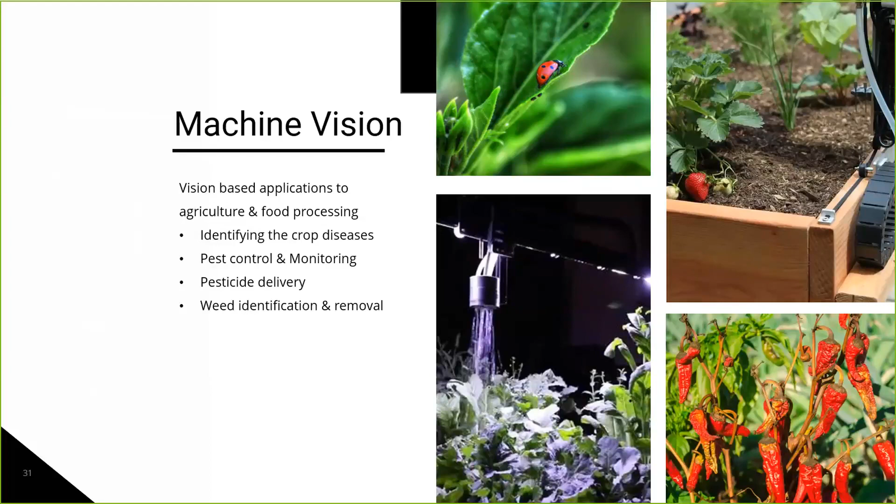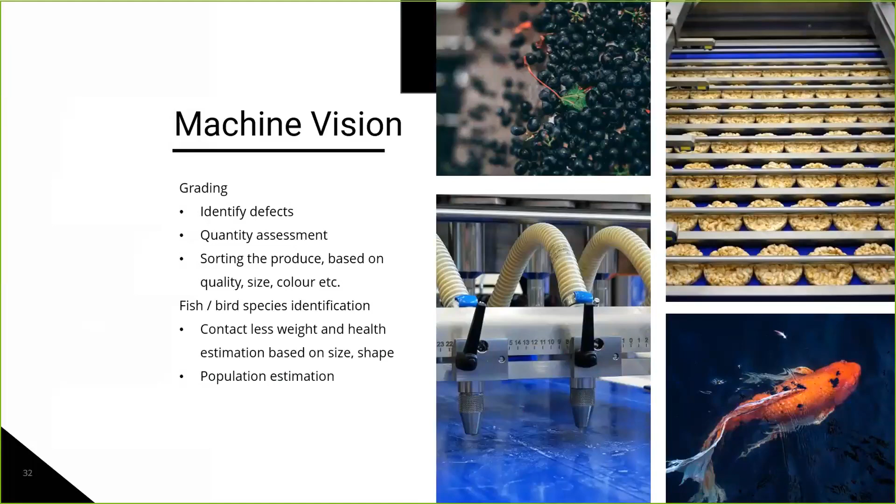For example, factories are already using things like grading to identify defects in products, and sorting products based on their size and color into different groups. In fisheries, you identify the weight and health of fish with contactless measurements, population estimation of certain species, and identifying different species of birds in forestry, and population counts. These are all machine vision applications that are heavily used already and still have a lot of opportunity in the future to implement.

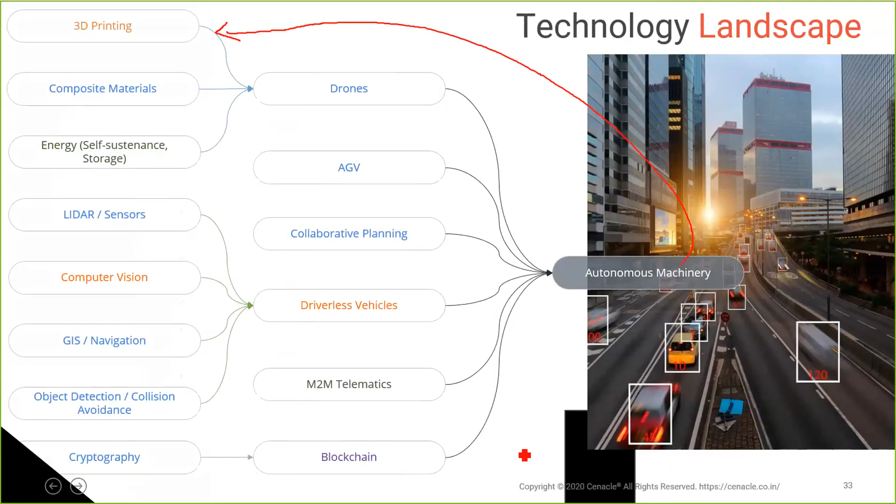So that's from my side with respect to Industry 4.0. In other words, what exactly is it giving for organizations? It is giving digital integration vertically and horizontally. More importantly, it is giving new business models, for example mini factories through 3D printing, distributed manufacturing. We just discussed how production can happen anywhere, from anywhere where the consumption is. It need not happen in a single or central location. It could happen anywhere. And most importantly, product as a service.

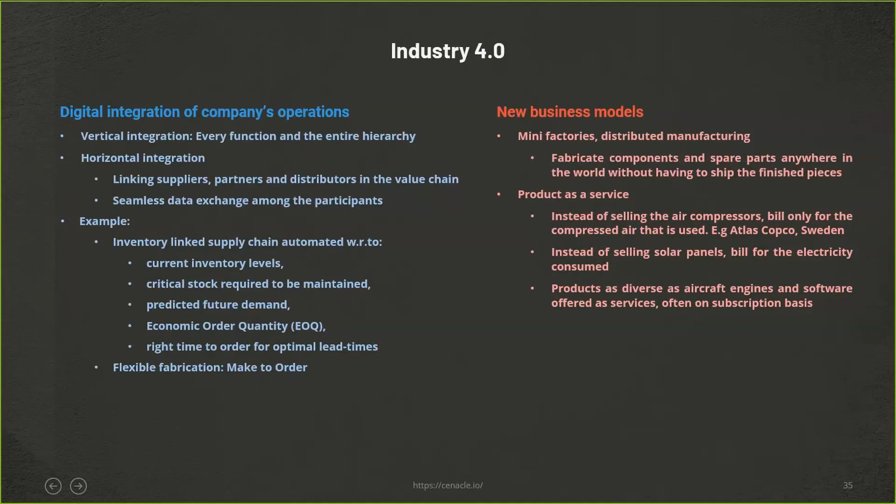This is a new business model that is emerging: product as a service. Instead of selling the product directly, for example like an air compressor, companies are selling the product as a service. That means the amount of compressed air generated and used, they are selling that, which means they still own the air compressor, but people pay for the compressed air, as well as for example solar panels, etc. This is a new business model that is emerging.

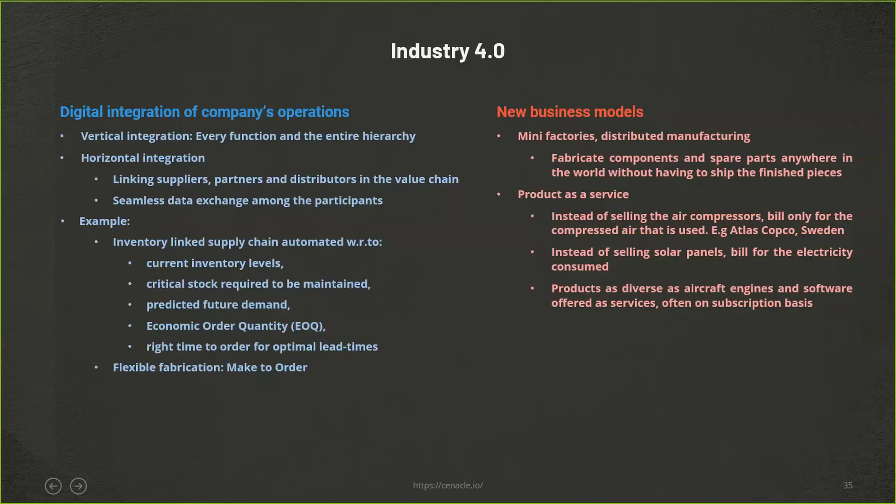There is also a corollary effect on other industries like fintech and edtech, based on things like augmented reality and cryptocurrencies. That is a direct correlation and contribution from Industry 4.0 evolutions.

So to summarize, Industry 4.0 offers scalable distributed production through mini factories, producing things close to the consumer, and a decentralized assembly line, and new business models such as product as a service, and being able to make to order a batch of one, personalized entities, manufacturing personalized entities and multiple parallel products at the same time, and new technology models such as autonomous machinery.